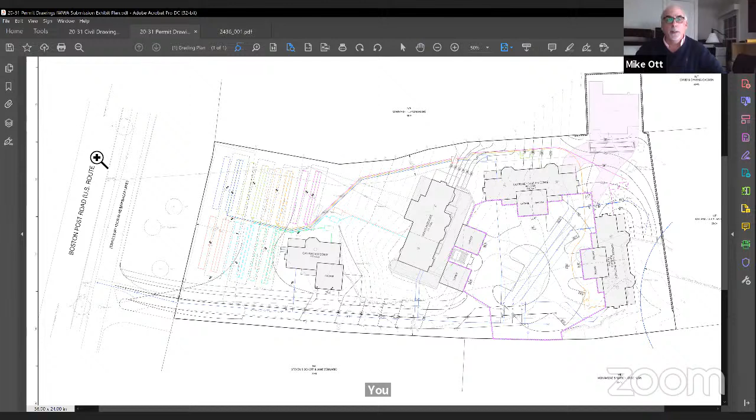I'll do this the same way I did it on the site walk on Saturday, I think. So the Boston Post Road on the left-hand side of the sheet, if you can see my cursor, Birnbaum Lane, adjacent to the Boston Post Road travelway. I think we spoke about this in the field, the existing driveway that serves the Ledges home on the property today will be widened to an 18-foot width.

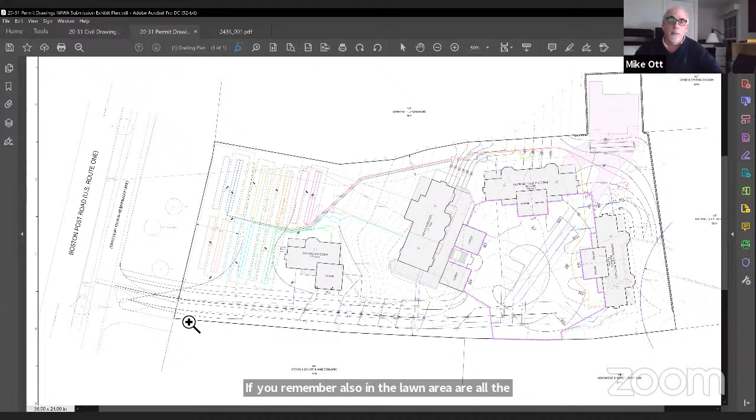The thing circling is building number 1, the gatehouse building down in the lawn area. If you remember, also in the lawn area are all the leaching fields. I don't know how well these colors show up, but I had to color them to keep track of them and the piping that comes into them. So there will be under the proposal a total of 7 residential units, and all 7 leaching fields that serve those units are down in this front lawn.

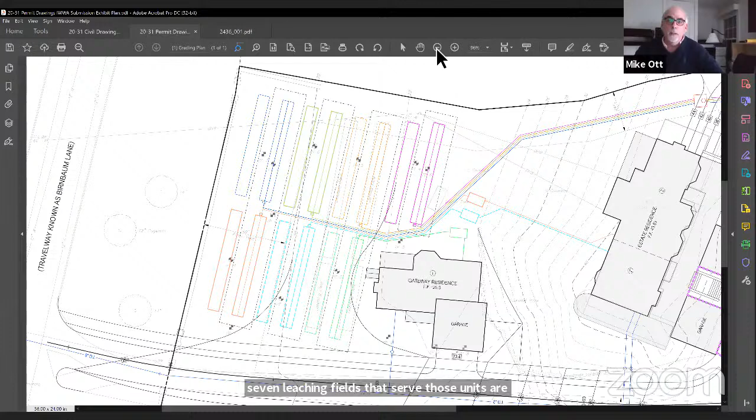There will be a little bit of rock removal to construct this first residence. Some of what I'm telling you, of course, is not directly related to wetlands, but I'll just do this as quick as I can, like I did on Saturday. There'll be a little bit of rock removal here to change the profile of the driveway.

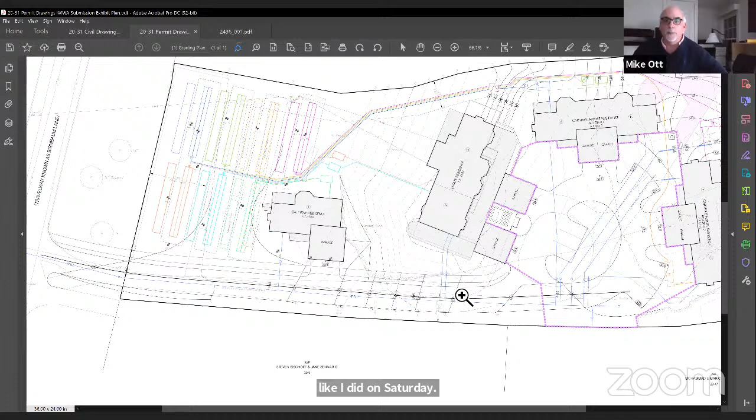And as you come up into the major portion of the site, if you recall, the estate house will be renovated and divided into 2 residential units. 2 new garage structures will be constructed. About 320 square feet, which I don't think I told you on Saturday, will come off the east end of the estate house.

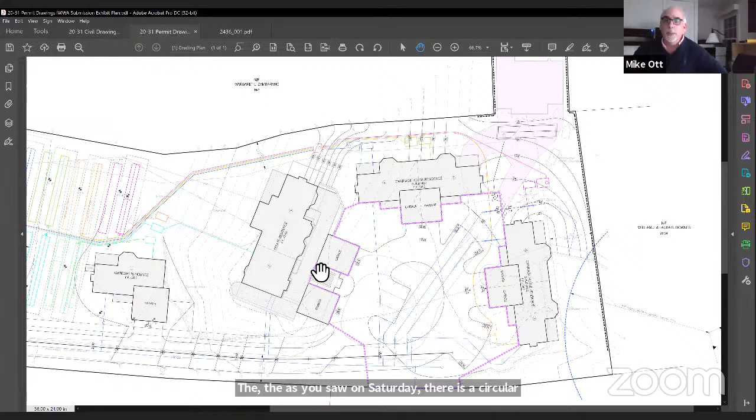As you saw on Saturday, there is a circular driveway here today. We will reconfigure it to allow for the parking that we've shown here and here and here. And the geometry of this is such that the town's fire apparatus can get up here and turn around.

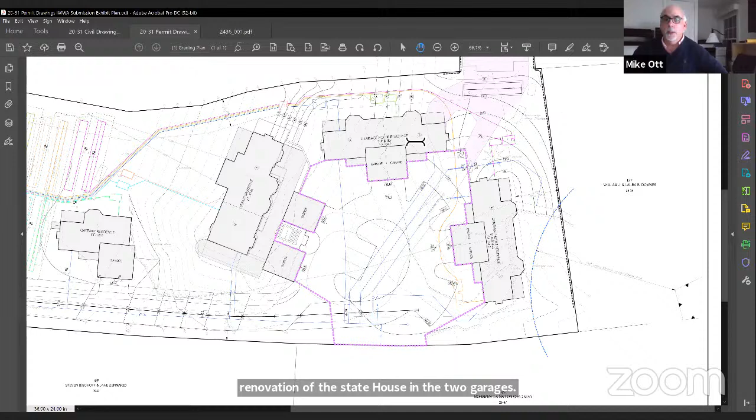So in addition to the new building 1 and the renovation of the estate house and the 2 garages, there will be 2 carriage house buildings constructed, 2 residential units in them. This is the first carriage house building and the second carriage house. The existing apartment building, if you recall, is to be removed.

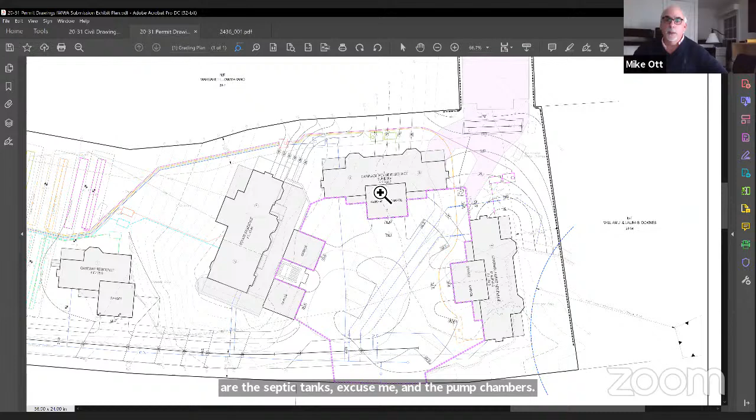In the rear, the only components of the septic systems that serve the 2 new carriage buildings, 4 units total, are the septic tanks and the pump chambers. I'll zoom in a little bit. This is a typical septic tank and a typical wastewater effluent pump chamber.

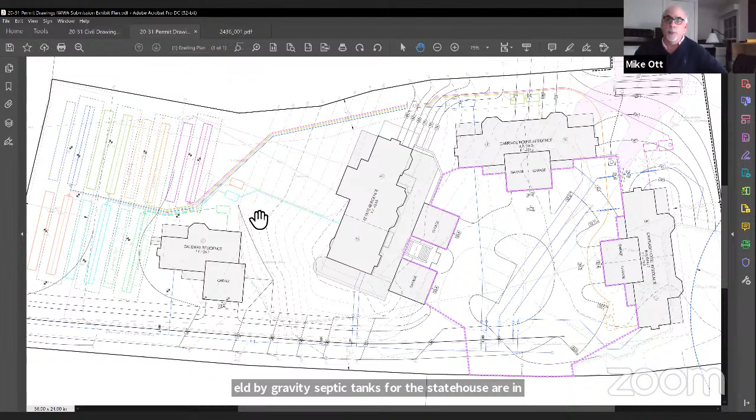The wastewater effluent will be pumped up, as you recall, to the east side of the existing estate house, to a distribution vault, and from here will go down the slope to the leaching fields by gravity. Septic tanks for the estate house are in the front, in the lawn, and the septic tank for building number 1 is in the lawn also. No pump chamber is required. So in the rear, we have 1, 2, 3, 4 septic tanks and 4 wastewater effluent pump chambers.

As I explained on Saturday, we are not changing surface water drainage patterns. If you recall, we are removing the apartment building and replacing it with gardens and seating in this appendage to the parcel. And we're also removing pavement in front of the apartment building. So this light purple shaded area is the total area of impervious surface that will be removed, and it is approximately 3,900 square feet.

So the building goes away and gets replaced by gardens and seating. The pavement goes away and gets replaced by lawn. We're actually reducing the total pavement area by a little over 100 square feet. But as I explained on Saturday on the walk, we are increasing the building roof area, of course, because we are constructing these 2 new units and these 2 garages.

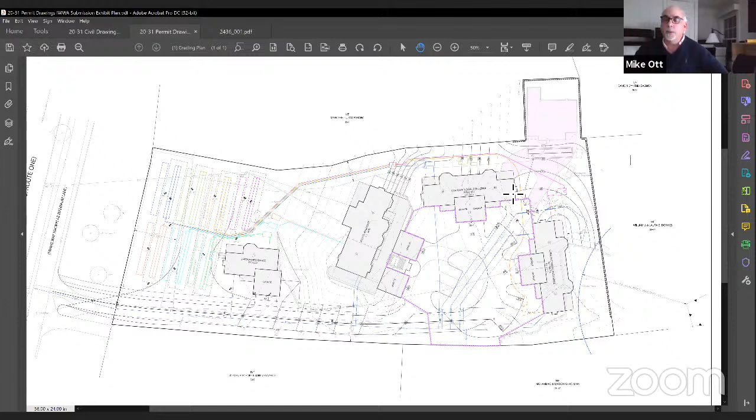They drain to an inlet here where my cursor is, and that water gets directed via a pipe to a subsurface infiltration system. It's sized to handle the water quality volume from this purple outlined catchment area. Although it's not required to treat these types of building roofs for water quality, we are going to infiltrate the first inch of runoff from the two new garages and the two new carriage house buildings within the existing island area.

We've done test pits back here, and there is 8 or more feet of depth of soil in the existing island area within the driveway today.

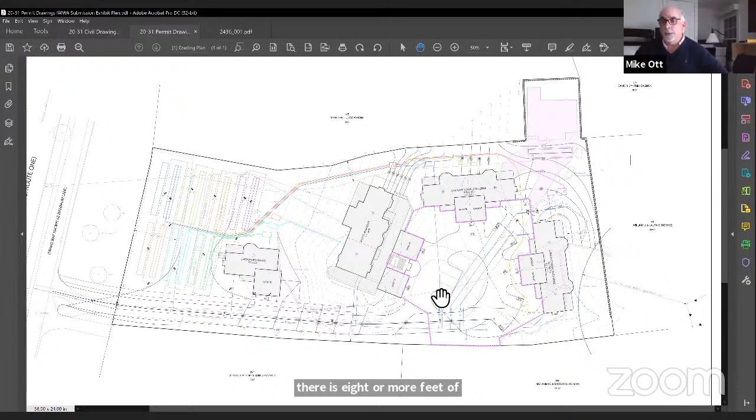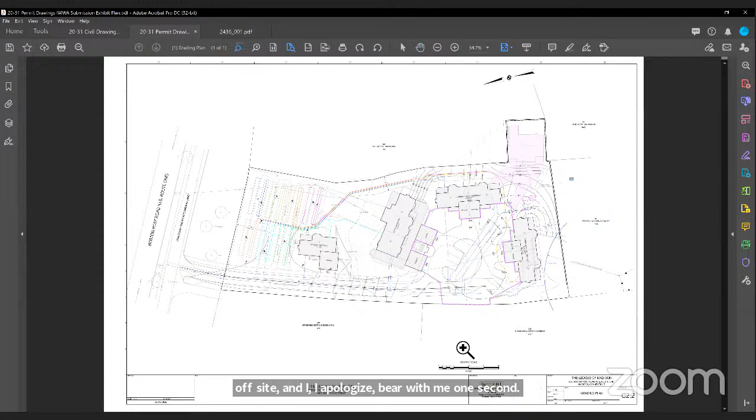So to get to what I think you're concerned about with regard to the wetland off-site, and I apologize, bear with me one second. So as we talked about in the field, there is an inland wetland located at the southwest corner of what used to be the applicant's property. And this wetland was delineated, I believe, in 2007 or 2008. It's shown on the record survey that's filed in the land records in the town hall.

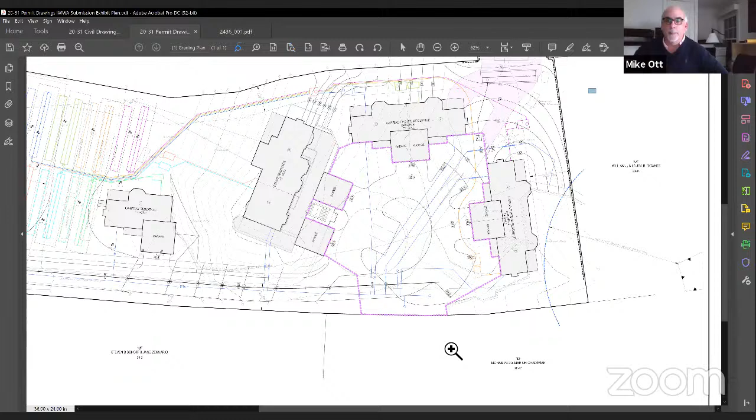This blue line is the 100-foot upland review area arc from this offsite inland wetland. If you remember, if I zoom in a little bit, we stood up here on top of the ledge and looked down at this wetland. This is where the two stone masonry posts were at the gate at the corner.

So the activity within the 100-foot upland review area is comprised of removal of rock along the southern and western sides of this new building, simply to be able to construct the building. As I said in the field on Saturday, we're not changing surface water drainage patterns. We're not introducing any new impervious surface area stormwater runoff to this wetland. We are simply excavating down approximately on a line that I'm tracing with my cursor into the rock to be able to construct this building.

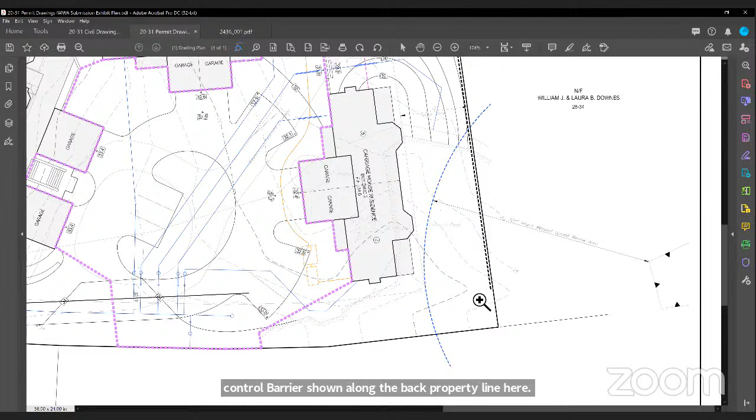And if you remember, I had said in the field, we need to go back into the rock behind the back of this house 10 to 20 feet in order for room to work and practically to be able to construct the house. That area will get backfilled again, and the area will be restored. There is sediment control barrier shown along the back property line here. It stops here because this is a ridge and runoff can't get up over that ridge and get to the wetlands. So that's why that barrier stops there.

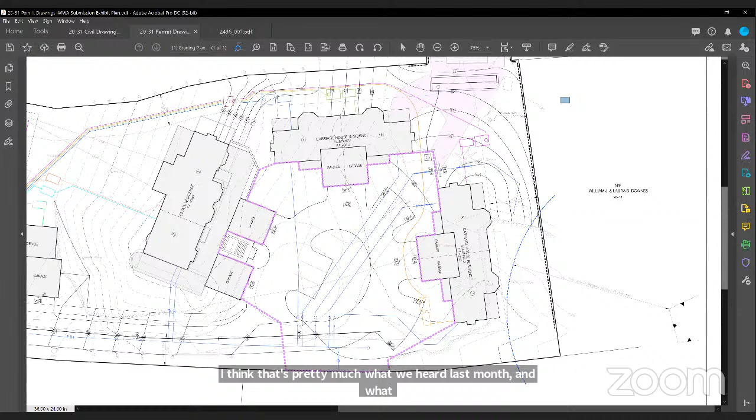And that's really the extent of the activity within the 100-foot upland review area. I'll talk about this other area in a second, but maybe I should stop here to see if the commission or the agency has any questions. I think that's pretty much what we heard last month and what we saw Saturday. So why don't we move to the other potential place?

Okay. So as Attorney McKeon said, when we were out on the walk on Saturday, George Logan, a soil and wetland scientist, was present, and he indicated that he was working for at least one adjoining property owner, and that he had delineated an inland wetland on this adjoining property. And we all walked down and took a look, and we saw his flags. Our activities removing this building and creating the garden and seating area are certainly within 100 feet of that inland wetland. But of course we do not have it mapped, as it just came up on Saturday.

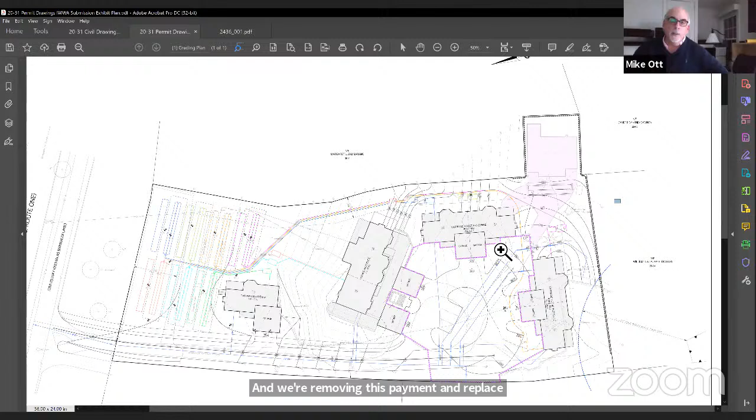It's my opinion that even though there is an inland wetland present here, our project does not have the potential to adversely impact it. I'll just very quickly say it again. We are removing this building and replacing it with gardens and seating, and we're removing this pavement and replacing it with lawn. And unlike today, where this driveway pavement drains ultimately in this direction, we are actually capturing the water quality volume and providing treatment for stormwater quality through the subsurface infiltration system.

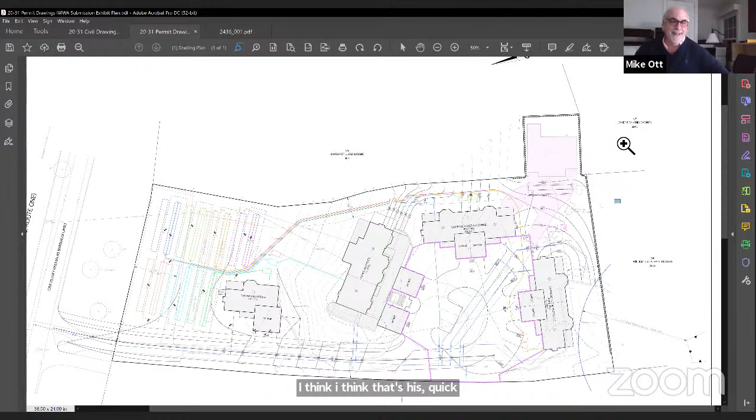So it's my opinion that this project does not present a potential adverse impact to this inland wetland. I think that's as quick an overview as I can do. And unless anyone has any questions, I think it'd be great for you all to hear from Rick Hosley.

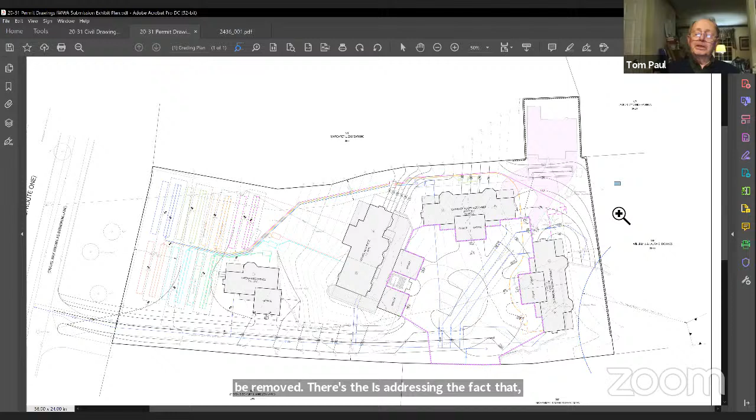I have a question. Saturday, you said that on the plans, where the garage is going to be removed, it's addressing the fact that while it's being removed, parts of the building as it's taken apart won't go into the wetlands. Was that siltation defense? Yes. Let me zoom in a little bit.

See the dashed line? Yes. That is sediment control barrier. It's called out on the plans, and there's a detail on the plans. It is geotextile silt fence, backed up by staked straw bales. Thank you.

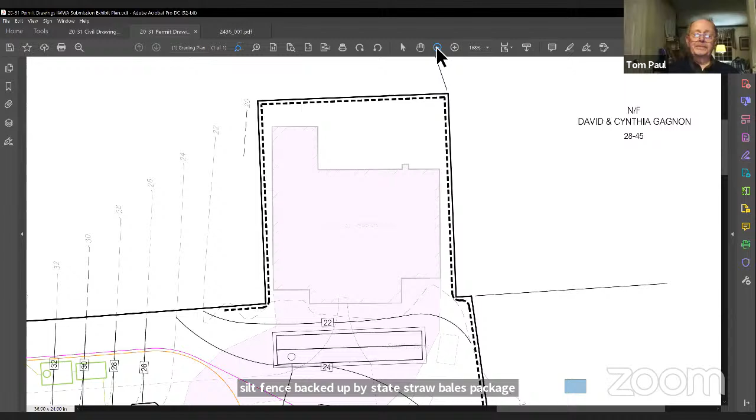I have a question, Kia. This is Joe. Now, on Saturday, I don't remember those two detached garages being talked about. I may have missed it. Mike, if those two detached garages weren't on the plan and they weren't a proposal, would building number 2 be able to go to the north and not embedded into the ledge?

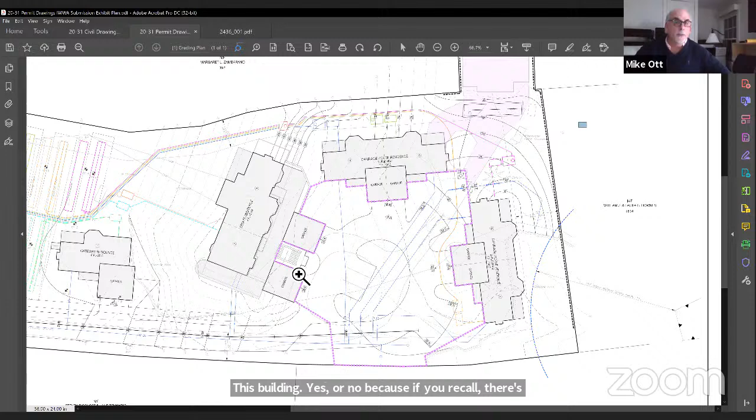This building, you mean? Yes. Joe? No, because if you recall, there's a set of stairs here to go up to the first level terrace, if you remember. Mm-hmm. So the edge of the pavement is right up against those stairs. Okay. So no, unfortunately. Okay. I didn't know if the stairs were proposed also.

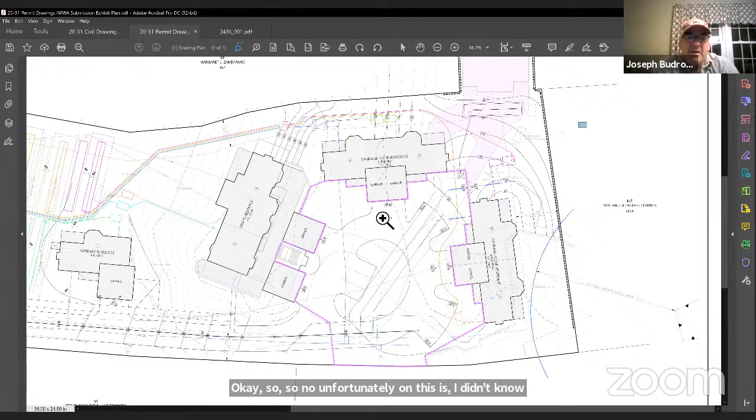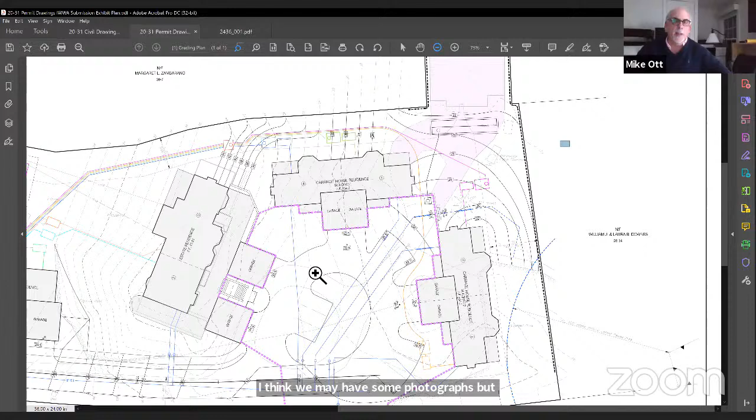Yes, they are. Actually, let me zoom in. I'll show you. This might be a little bit hard to see, and I don't think I talked about it, but see the stairs? So those exist or are proposed? They exist, and they're going to be reconstructed. Okay. I think we may have some photographs, but they definitely exist. I'm sure some of the members must have seen them out there. I just wanted to put on record that those two garages weren't the reason building 2 is farther south.

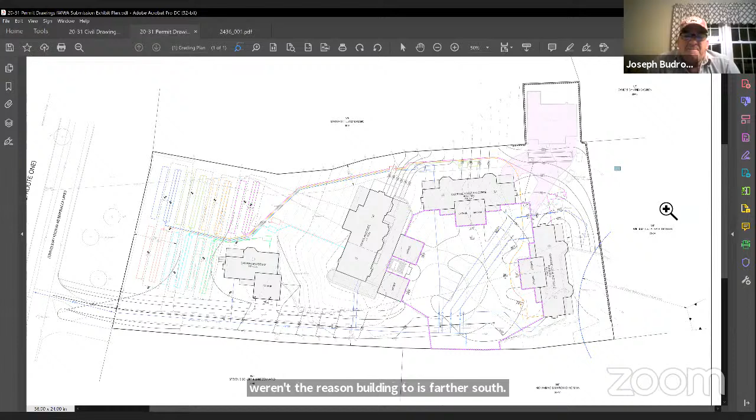Okay. Any other questions before we hear from the next person? Okay. So Rick, would you like me to leave that drawing up for you? At this point, Mike, we can call it back up if necessary.

My name is Rick Hosley. I'm a geologist, explosives engineer. I've got some photographs I'd like to share with you just to talk about the scenery a little bit and explain or answer any questions you might have from my opinion in terms of the geology, the geologic structure, and what is present on site. My company is Realty Securities. It's related to Hosley Companies. We are a 98-year-old company of explosives engineering.

You're familiar with the site of the ledges. And what's exciting about this site is the history and the fact that there's evidence on site that much of the property was built or sustained by the rock that is on site. And I think that may go back to prior to what we see present. In other words, it may have been quarried from other structures on site.

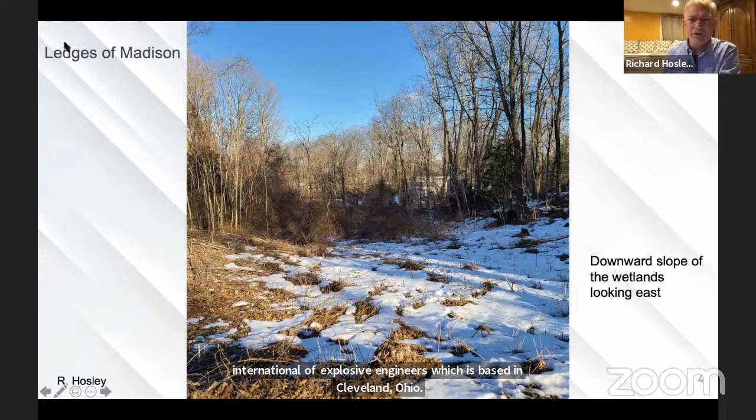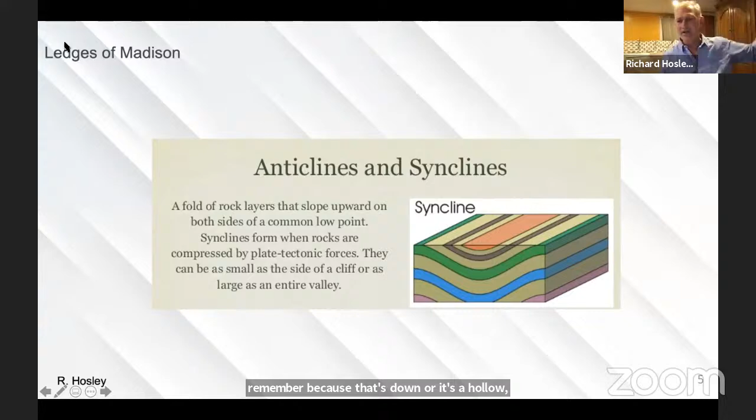This photograph is looking down into the wetlands, basically down into the water course from a higher elevation. And my purpose in this photo is just to talk a little bit about the topography. Essentially, that hollow or that downgrade is a syncline. Anticlines and synclines are rolling hills that are the result of compression from the formation of metamorphic rock. This is a metamorphic gneiss, again, called the Waterford Group. Syncline is easy to remember because that's down or it's a hollow. So when you sink, you go down, anticline, it comes up. A little easier way to remember that.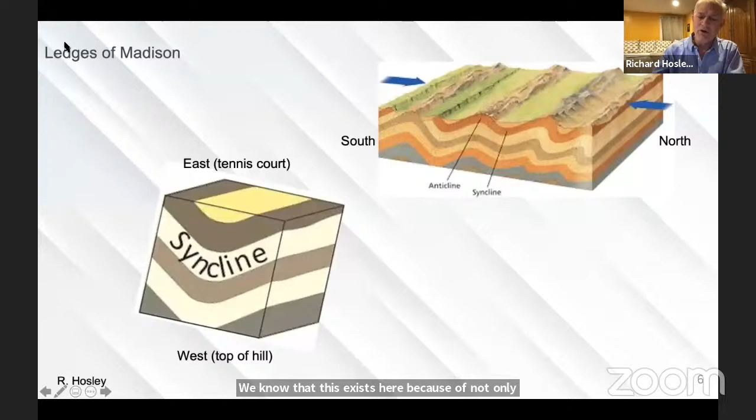This is another example of where the tennis court is, the syncline symbol, which is at the bottom of that slope. Top of the slope is the top of the hill. My illustration on the right is how that metamorphic rock is squeezed. And you have these knolls and hollows of repetition. We know that this exists here because of not only the topography, but also because there were some test borings that were dug or some test holes closer to the ledges residence in between the rock outcrop and the ledges. And there they found, I believe, 10 feet of dirt, 8 feet of dirt before they hit solid ledge.

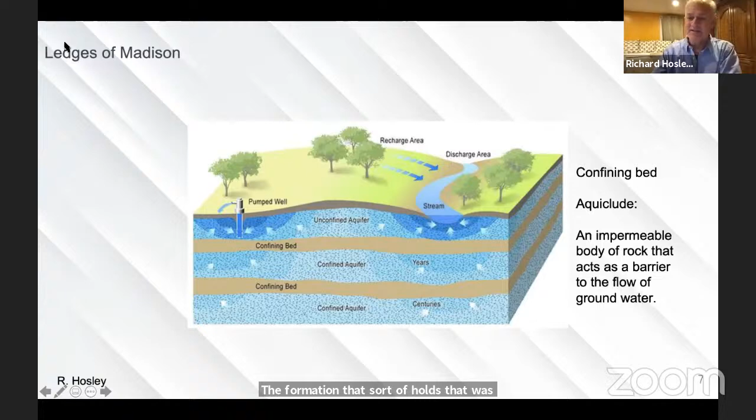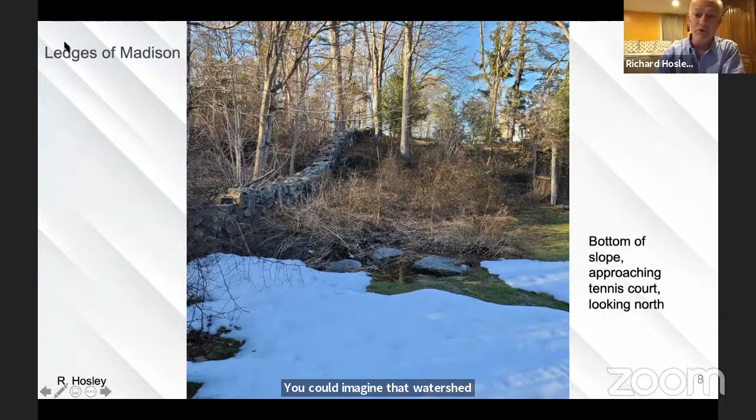So when we think about this wetlands, we think about the discharge area and we think about the confining bed, which is called an aquiclude. That's basically a non-permeable rock layer, the formation that sort of holds that water in that syncline or in that little valley. This is at the bottom of the syncline adjacent to the tennis court looking upward. You could imagine that water sheds from both sides of this syncline from the peaks, which are the anticline.

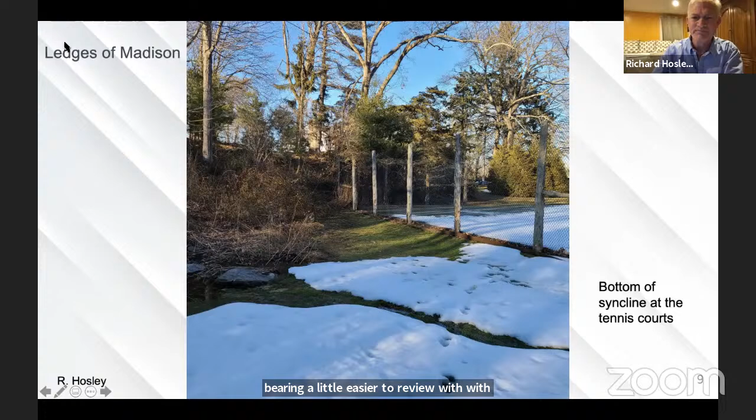Again, the tennis courts, just to sort of get your bearing, a little easier to review with a sunny day rather than a rainy day. Let me see here. Again, another view looking up the hill toward the ledges property. We're looking north in this direction.

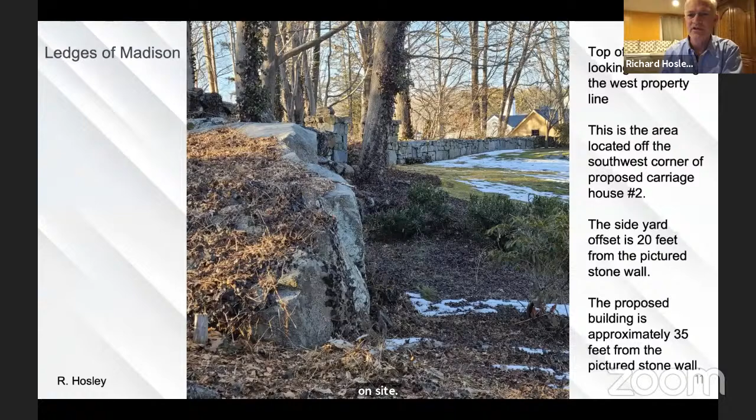Here we've come to the top of the hill where the ledges are located, the actual rock cut and face. And this is where there's evidence that there was some prospecting or dimensional stone production for what I believe are the stone walls and structures on site. The stone wall that you see in the background represents the westerly property line, again, looking north. Looking into the ledges that we were talking about earlier that I believe Mike mentioned that he was standing on.

What is prominent in these ledges or in this rock face is this cleavage or these planes that were a successful point of relief for past dimensional stone rock producers. In other words, they would use this cleavage, which may equate to a lineation of north to south in the crystal alignment when this geologic unit cooled. With that crystal alignment, you have a point at which you can cleave the rock.

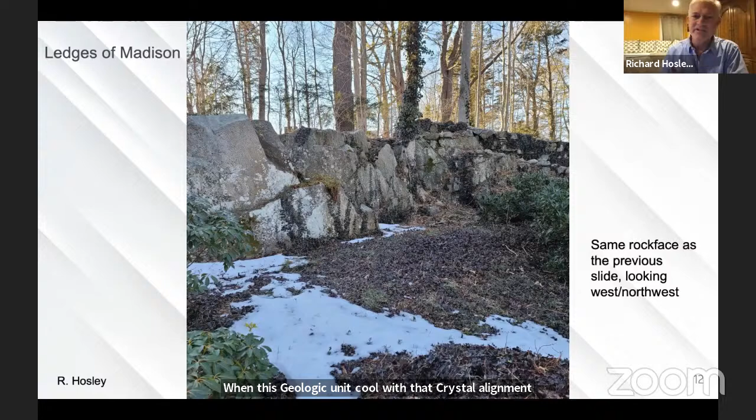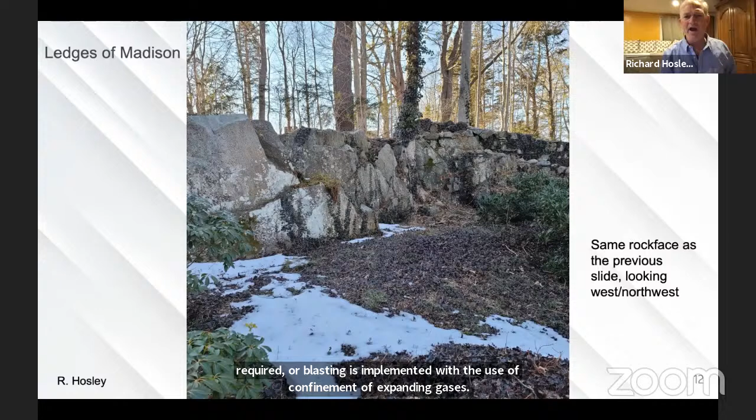This is significant in the sense that during rock removal, whether hammering is required or blasting is implemented with the use of confinement of expanding gases, these pre-existing cracks or the direction of north-south or this lineation dictates essentially how the rock breaks off and what the fragmentation size will be. This is a fine example of what we saw out in the field relative to some of the dimensional stone retrieval that we believe took place here.

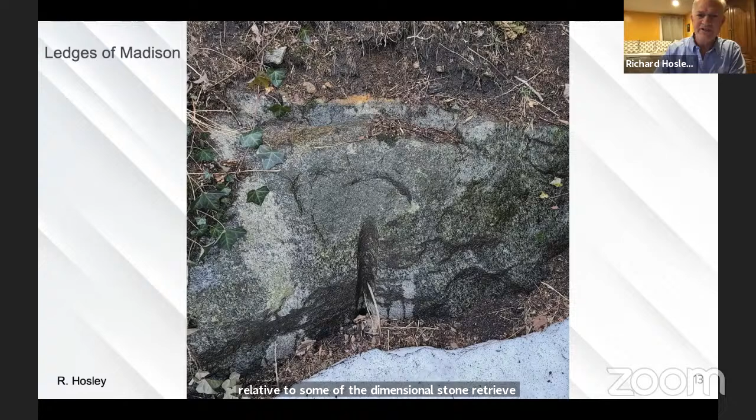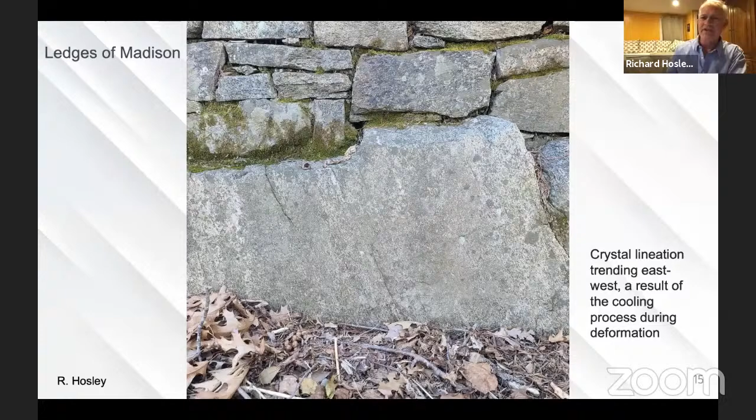This is another spot toward the bottom of that syncline outside of the tennis courts. As you can see in the background, we have the tennis courts. And I wanted to draw attention to this little stone wall, which is sitting on top of the ledge. With a closer look at it, you can see this lineation. These are essentially alignments or cooling joints that formed, that we call geologic structure, that is associated with metamorphic rock found in this area, the Waterford Group. If you note, this lineation falls at an angle of about 33 degrees.

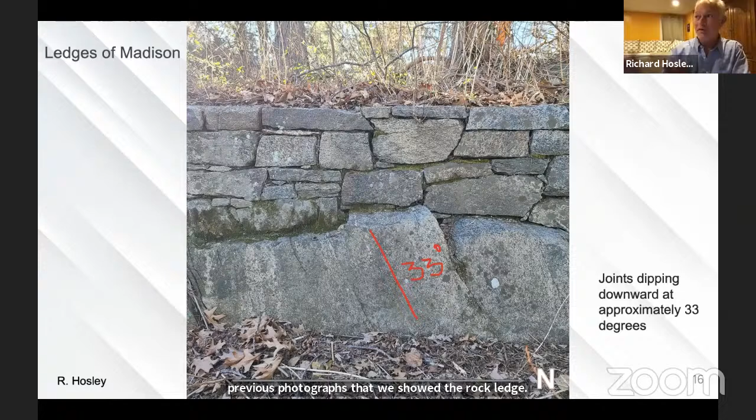Why is this significant? Well, as you remove this ledge, as you migrate rock removal toward the tennis courts or toward that syncline, you will be cleaving the rock at this angle. So the resultant rock face running east-west will be at 33 degrees. And in the previous photographs that we showed, the rock ledge will be north-south in lineation, but fairly straight up and down, almost 90 degrees.

Here's another example beyond that same photograph you were looking at, only over to the left. A natural crack has broken this way. Why is this significant? Well, if the rock to the right is removed, the rock to the left remains a solid, impermeable rock mass that will not allow the water to migrate through it. And I think this is significant in terms of not only sheet flow from the surface, but from the excavation if a foundation is put in within that 100-foot or beyond that 100-foot upland designation.

These are some photos of the front of the ledges. Michael mentioned that a portion of the front eastern section of the existing house will be removed. Right below that, you can also see another prospect. Again, this supports those northwest lineations or cooling joints that we've seen in the back.

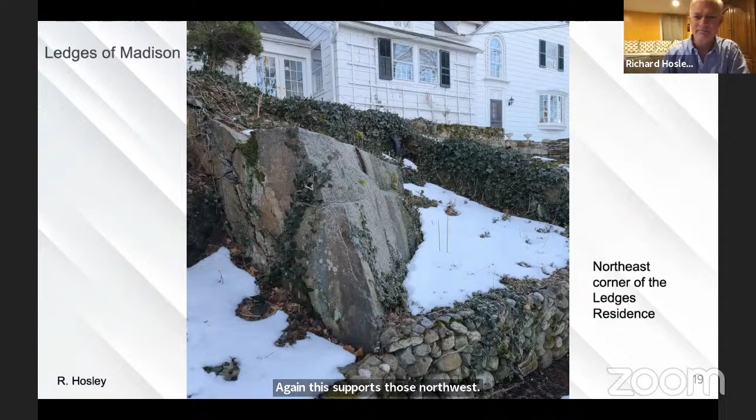This was cleaved out, again, I would assume for dimensional stone production, and it allows for the placement of what Michael described earlier, which was his septic system trenches and distribution box, that sort of thing. My point is that the geology lends itself to the direction that he has created or designed these trenches and underground utilities.

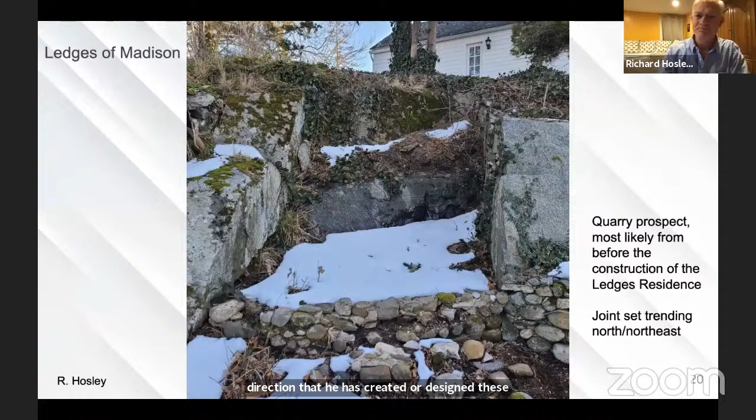This is another off-site point that I'd just like to bring to folks that are concerned about damage to rock outside of the construction removal. This is an example of basalt, which is highly fractured and intensely full of geologic structure, lots of cracks. What I'd like to point out in this photograph is that the blast design or the rock removal design was such that the half rounds of the drill holes remain, which are pointed out, evidence that only the rock that needs to be broken can be broken if the blast design is prepared properly.

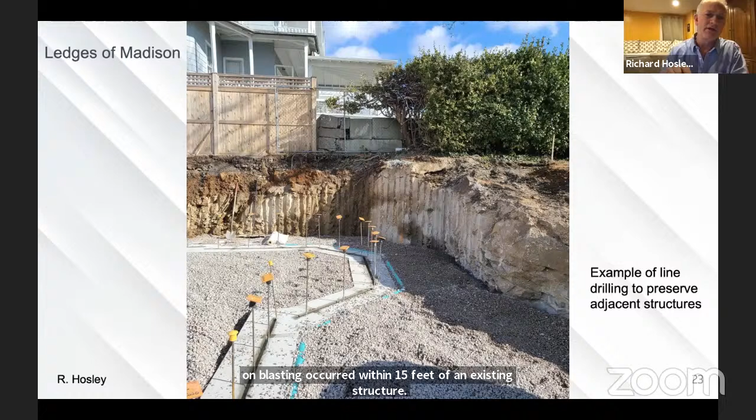Here are some others. This is a project in Stony Creek, Connecticut, that recently took place where rock removal and blasting occurred within 15 feet of an existing structure. These are very high-end structures right on the water in Stony Creek. A closer look at this describes some of the horizontal bedding or pre-existing cracks in the rock. And then to the left of the screen, you see some of the decomposed geology that occurs in various locations as you migrate through a geologic unit, depending on how it was formed.

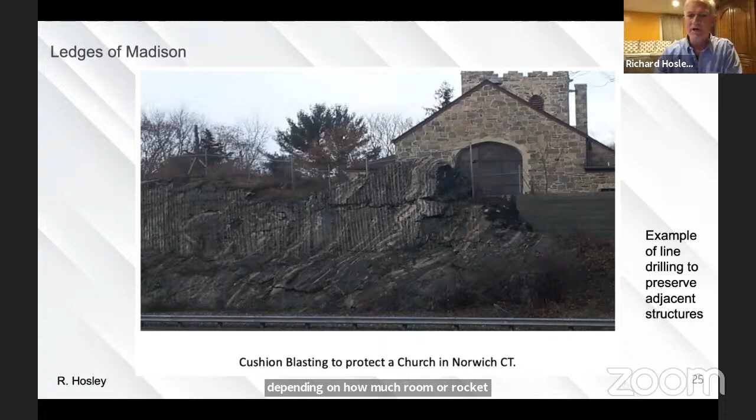So, and then finally, one of my favorites, this is in Norwich, Connecticut. This is where rock removal along Route 2 was designed to protect the structure behind it, a pre-existing church. And there are multiple methods of cushion blasting or sensitive blasting or low detonation velocity blasting that will help preserve this. And I'm recommending to the applicant that this be evaluated as we encroach on the wetlands, depending on where that wetland delineation is, and depending on how much room or rock excavation should occur behind the proposed buildings.

And with that, I apologize for being passionate about my work. I think it was very good. That's great. So for the commission members, agency members, any questions for Mr. Hosley? No questions. One little question.

That Stony Creek picture, how loud would you say that blasting was to the neighbors? So the interesting thing about this project is, and one of the most important parts of any construction project, is to involve the community. There has to be public relations, notifications of the work to take place, conversations about concerns, addressing to the community historical evidence that, say, a new construction project may not have.

Once that took place, concerns about the construction of adjacent structures, whether there was horsehair plaster in the adjacent construction materials, whether there were sensitive ground motion construction items or photographs on walls or vases, all of this attention to detail occurs long before any of the rock excavation. Therefore, opening a point of conversation so that people can talk about what their concerns are.

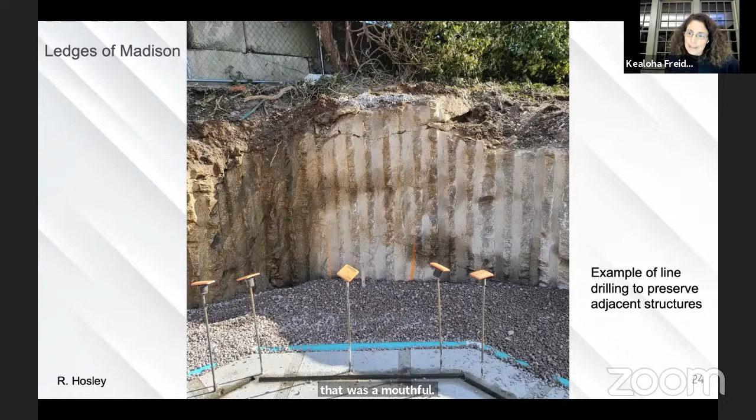That was a mouthful. All right, thank you. Any other questions? Yeah, any other questions? Okay. Well, I think that was all that we were expecting to hear from the applicant, right?

Okay. Reiterating my earlier request that we would like to keep the public hearing open until next month so we can gather the additional information and bring our same group back to address the area of wetlands that you all saw on Saturday that had been flagged on the adjacent property. Right. Yes, definitely, because we also are going to want to hear more about that since this isn't going to be fully complete.

All right. So I imagine given some of the letters, that we have a number of people who would like to speak. Is that right, Dave Anderson? And we have approximately 32 attendees on right now. Some of them are for later agenda items, but there are a number of people here for this agenda item. Okay. What I would like to just say is that this is inland wetlands. It is not planning and zoning.

I've read through the correspondence that people have submitted, and there are a lot of opinions about this type of development in this area, and that isn't what we are in charge of. So if possible, it would be great if, as people speak, they can really reference their concerns with respect to the wetlands themselves, because that's really all that we can talk about with respect to the application. So Dave, I'll let you handle people who want to come in and speak. Yeah, so for folks that are attendees on the meeting, if you could raise your hand if you'd like to ask a question or make a comment, and I'll unmute you sequentially as you raise your hand.

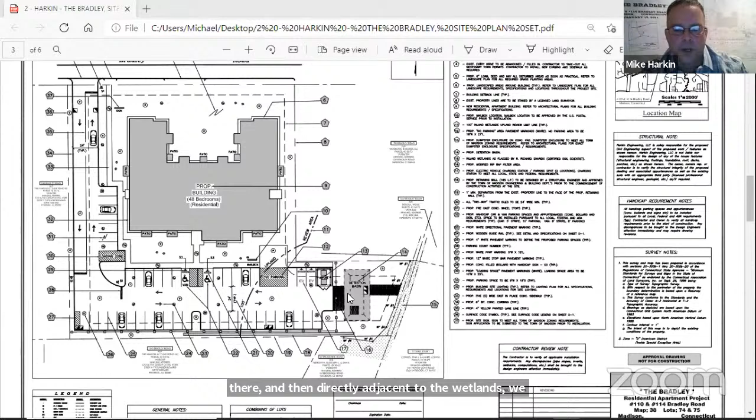If I scroll down more, you can see the site development plan, which again shows septic systems located in the front, one in the driveway, and two in the rear parking lot. Again, the 100-foot upland review area is where my cursor is. All the utilities are coming off the street. There's one section of utilities coming off the west that will run along the west side of the building and then tie back in over here.

And then all the drainage ultimately gets collected through a set of catch basins located throughout the project site, and then it gets piped into that proposed detention basin. The detention basin then has an outlet that spills over into that wetlands. So we're not really changing any drainage patterns on the site. All the water is getting into this wetlands. And I'll just scroll down real quick again.

So we have a full erosion control plan, a full sheet dedicated to erosion controls, where we have the stockpile area shown throughout the subject site, as well as silt fencing, as well as staked hay bales adjacent to the wetlands. And then we have a call out for erosion control blankets and the calculated size for the erosion control blankets. We have a large scale construction entrance in the front of the property. Every catch basin after install will have hay bales placed around it. All the catch basins will be equipped with hoods to catch any sediment or debris after the project is built.

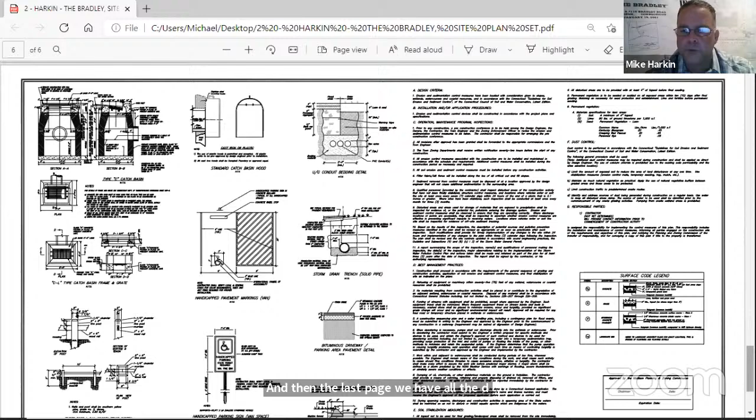And on the last page, we have all the DEP requirements for wetlands, such as dust control during the project. We will have a post-development monitoring program for that detention basin. So again, that's the project in a nutshell, as quick as I can go through it. We went into it pretty much in detail at the last meeting.

I took a series of questions at the last meeting. I answered them all. There was one that I couldn't answer. I think Tom had asked for the distance from our property to Tuxis Pond. And that distance is 540 feet from the edge of our property to the pond.

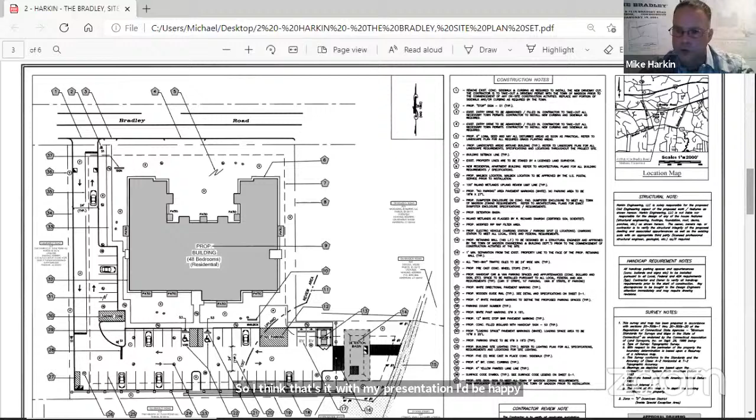So I think that's it with my presentation. I'd be happy to answer any additional questions that anybody else has or has thought up over the last month. Mike, I have one question. Sure. You have a septic system plan. Was that approved by the health officer?

Right now, that is getting approved. It's in the midst of getting approved by her. I had a sit-down meeting last week for 2 hours with her, just going over everything. She required some additional information, which was the physical layout of each floor plan.

This is at DEP? This is not DEP. No, we're less than 7,500 gallons. But you have more than 30 bedrooms. Right. So each bedroom is broken down 150 gallons per bedroom. So if you do the 48 times 150, we're less than 7,500.

So the septic break off is 0 to 2,000 is local. 2,000 to 7,500 is State of Connecticut, Mr. Bob Scully's department, and anything over 7,500 is DEP, which is Mr. Michael Hart's division. And Mike, that changed what, a few years ago? Yeah, it was implemented about 2 years ago.

Oh, it did. Okay. All right. Yes, that is a relatively recent change, Dave. It used to be 5,000 gallons, which is like 33 bedrooms. Well, it used to be 33 bedrooms on a certain length. Yep. Yes, sir. You're right. You're 100% correct. Exactly. And 2 years ago, they changed it to that 7,500 mark. Good. I'm glad to hear that. Okay. I retract my comments.

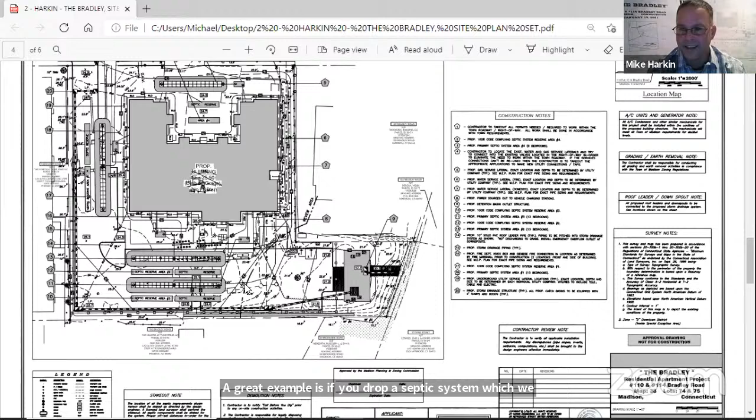A great example is if you drop a septic system, which we do quite often, 15 feet from the shoreline, the levels of nitrogen far exceed that 10 milligrams per liter going into Long Island Sound. In this instance, we're less than the 7,500 gallons. But in our design, to offset nitrogen levels, we do two things.

You can add a blower system, what they call a soil air system, which we've added to all these septic systems. That further reduces the nitrogen levels coming out of the septic systems. So we have soil air on all of these. And we have a lot of grass green areas. How you dilute nitrogen is with water. So with all that grass, water and infiltration, the nitrogen is diluted throughout the project site.

Well, I could talk about septic systems all night too. I think they're super, super interesting with respect to wetlands, but we'll just have to stop. The first 10 feet of a wetlands actually cleans the nitrogen out better than anything. Yeah, there's all kinds of things we could talk about, but we'll have to just save that for another time. Does anybody else have questions?

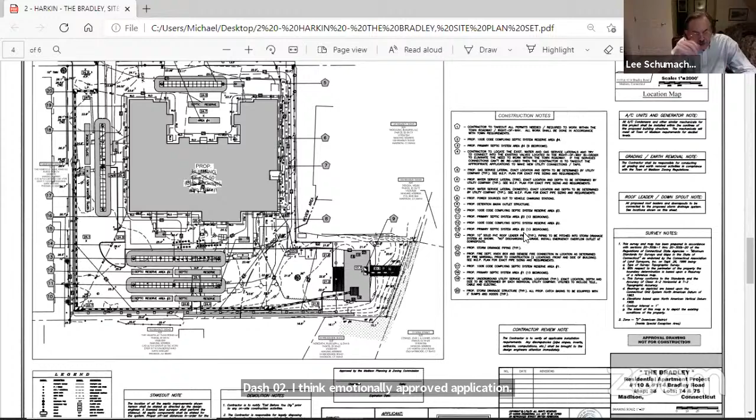Nope. No. All right. So again, this is our second time seeing this. So I will entertain a motion for how we want to deal with this application. I'll make a motion. I don't have the number though. It's 21-02. I make a motion we approve application 21-02 as submitted. I'll second it. All right, Lee seconded it. Any other comments or questions? Okay, all in favor? Aye. Aye. Aye. All right. Thank you.

All right, guys, thank you very much. And anytime you want to talk about septic systems, feel free. I'm kind of number one in the number two business these days. Okay. All right, guys, have a great night. Thank you very much. Thanks, Mike. Thank you. Thank you.

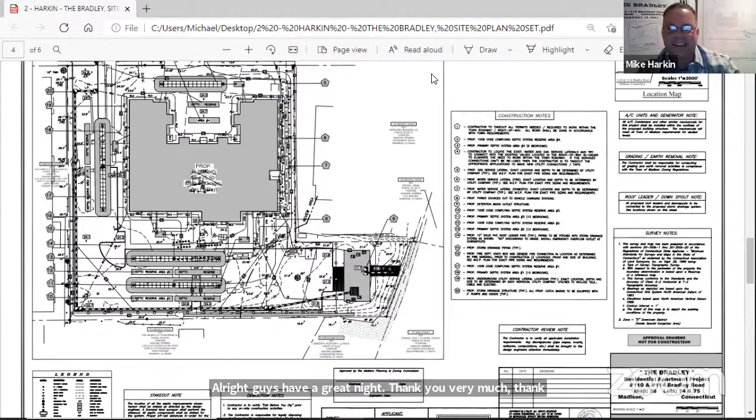Okay, we're getting there, guys. Now the next three applications are for receipt only tonight, so this is going to be our first go around. Our first one is 21-04, 68 Sterling Park Drive. Yeah, Kayla, I can speak to this a little bit. Rich Gentile, the owner of this property, is not able to attend the meeting this evening. So if there's any questions, I'm familiar with this. It's not an egregious wetlands project. It's a small addition to the garage. I can fill you in a little bit if you're interested, or we can hear it again next month. Whatever your pleasure.

How close, Dave, John, is this to a wetland area? 75 feet. Could we make it administrative? Yes. Or is there more activity around it? No, there's really nothing. That's a great question, and I'm comfortable with section 13, but I wanted the agency to just take a look at it, and unfortunately, Rich is not here. When I went through it, it's a 9x18 small shed, basically attached to the garage. Its closest point to the closest flag is 75 feet. There's no foundation. It's a slab on grade. No disturbance of anything that's there at this point. There's no footing drains. E&S will be prior to the start, maintained during, and all disturbed areas would be stabilized as soon as possible at completion.

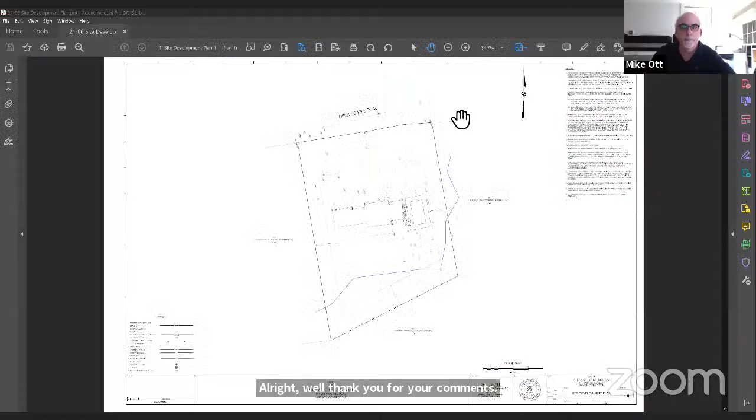All right. Well, thank you for your comments. Can you see my screen now? Yes. Okay. I don't know how I did that, but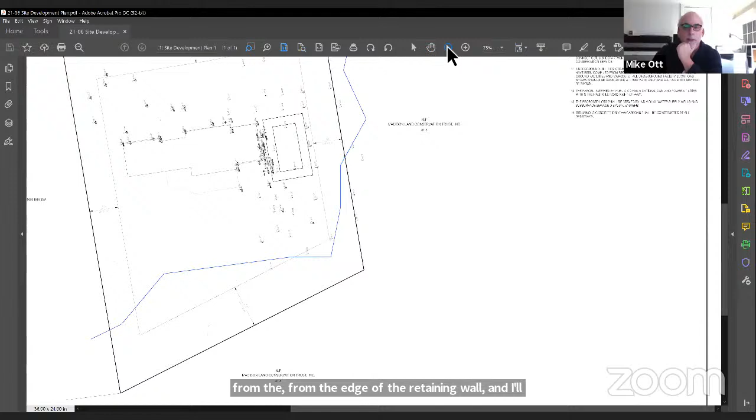so the blue line is the wetland boundary. This point is the closest point, which will be 20 feet from the edge of the retaining wall. Let me zoom back out a bit again. So Opening Hill Road at the top of the sheet, the open space parcel wraps around. This is Madison Land Conservation Trust. This is a single family home on the west side. The blue line is the inland wetland boundary. You can see it comes around the back.

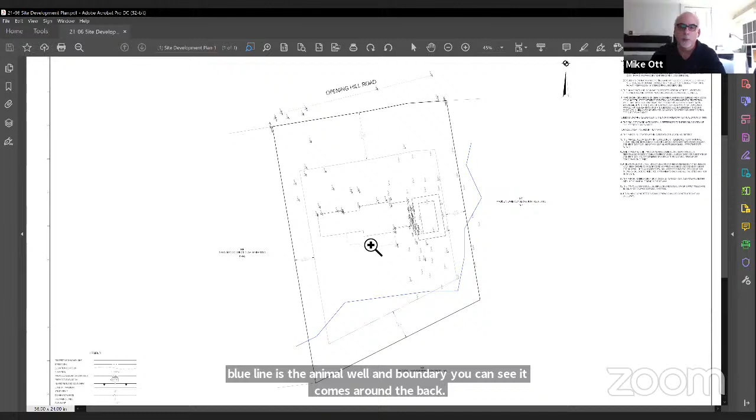We only did a partial topographic survey. If you were to come out to this site, you would see that all along the length of the house, the backyard is raised up very high and drops down to the inland wetland. This is actually the only place to get a pool and to be able to get it furthest away from the wetland that we can. So it's this short distance right here at this point. That's the 20-foot distance that I was talking about.

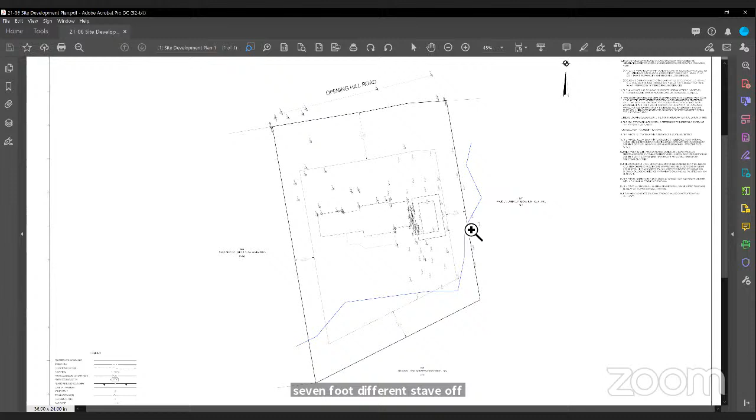What's the grade there, Mike? It's about a 6 or 7 foot difference, Dave, over about 20 feet. Okay, thank you. Yep. But the building setback line, which I'm tracing, is the line that we have to respect, of course, with the retaining wall, not the patio, but the retaining wall.

Okay. Where's the retaining wall, Mike? I guess I missed that part of the presentation. I'm sorry. I'll trace it here. It'll be right along the building setback line, right here. And what's there now? Is it yard now or is it woods? It's a grass slope down to the edge of a wooded area just outside of the wetland boundary. So this is the lawn, a sloping lawn, 6 or 7 feet elevation difference. Similarly in the backyard, it's a sloping lawn.

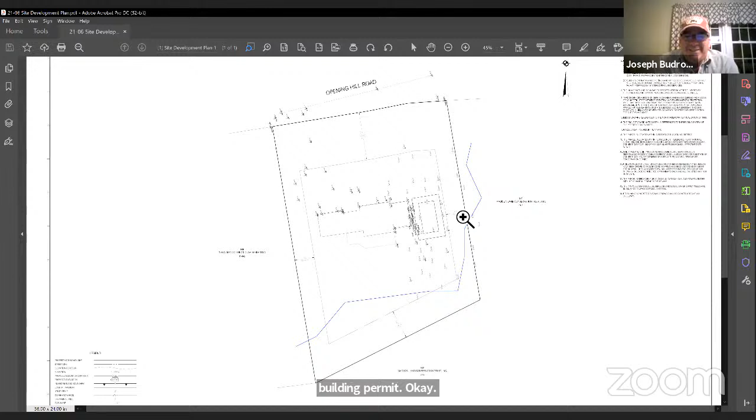From lowest grade to top of the retaining wall, how tall is it? 6 feet. Okay, nothing that the town engineer should look at? Actually, the town engineer wouldn't look at it. The building official would. It'll need a building permit. As you know, Joe, right? No. I slipped for a second. You slip. Yeah, it will definitely require a building permit.

And there's excavation. And the materials I got didn't have that site plan. So no, I don't know if anybody else did. You did not, and I apologize. We waited for the snow to melt a bit. We actually did the survey Friday morning. Wow, Friday morning. I just can't find that. I apologize. I should have said that when we started. Yeah, 'cause I went through all my files. I was like, I don't even have it. I don't think any of the new apps had submitted plans. Oh, no, Liberty, our last one, has one.

Okay. So there's going to be excavation, presumably, right? For the retaining wall foundation, yes. And then all the proper soil and erosion control measures. Yeah, and I can go through it in much more detail at the next one, but yes, absolutely. There'll have to be a sediment control barrier, and if they have to dewater, it'll have to be pumped up on the lawn, so it'll drain back after infiltrating into the grass, and all the standard controls that you would put in place for work that close to an inland wetland.

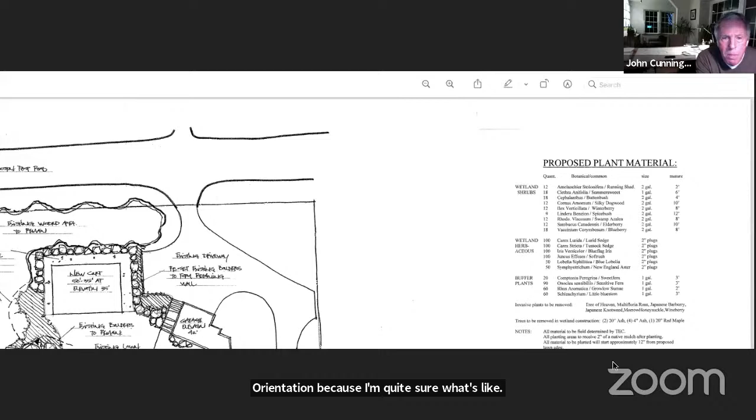Okay. And if you like, Claire, I can share my screen of my plan just to quickly go through it, or we can wait till next week, whatever you'd like. Well, I think you could share because if you're creating a wetland, we may want a site walk, but if you can share, then maybe it'll help us. Okay. Give us orientation, because I'm not quite sure what it looks like. Okay, can everyone see that now? Yes. Okay. I know it's getting late. I'll be as quick as I can.

Here's the existing residence. The upper garage area is at elevation 42. The residence runs on Boston Post Road. It also has a driveway that empties out onto Liberty Street, so it has two different entrances. Right now, the rear of the property is just all lawn. The wetland area, as you can see in my plan, was flagged by, I believe, Rich Snarski probably 10 years ago. We're leaving that as is. We did make a note that we'd like to remove any of the invasive material in there.

The little area that I talked about is this area where my cursor is right now. It is full of Japanese knotweed and wineberry. There's nothing in there that is of any value to any wetland. We'd like to fill that back in so it's back up to elevation 34, which the rest of the rear yard is. That being said, this little slashed line would be a new planting bed that would act as a filter from the lawn area to our new wetland area. This is the new area that Rich would be working on. It's at elevation 25, where the rest of the wetland area is at elevation 26 to 27, so it works in well with the existing wetland.

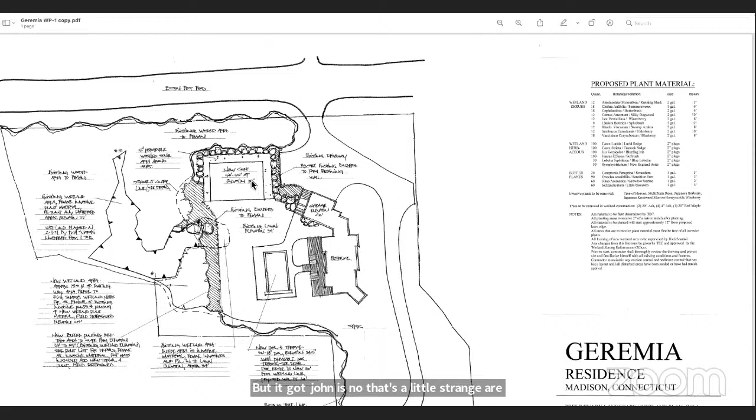John, I assume that's a little stream running south out of there? At the bottom. Go ahead, I'm sorry, Dave. There's no stream on the area, just the existing wetlands. Well, what's that squiggly line that comes down there, under the pool? Tree line, I think. Oh, I'm sorry. That's just the existing branch structure of the existing trees, Dave. Oh, okay. I can't read what it says, so thank you.

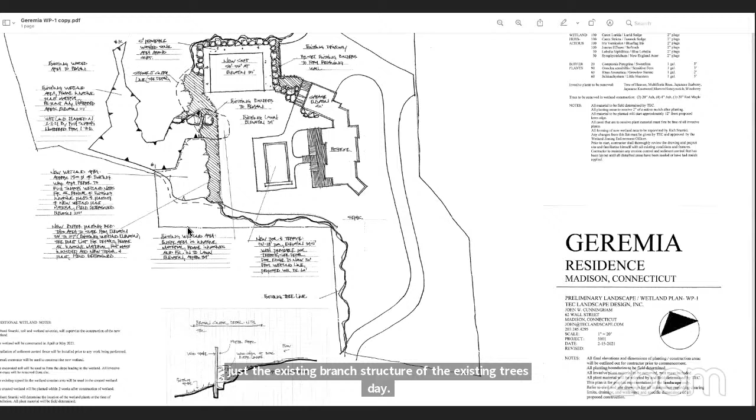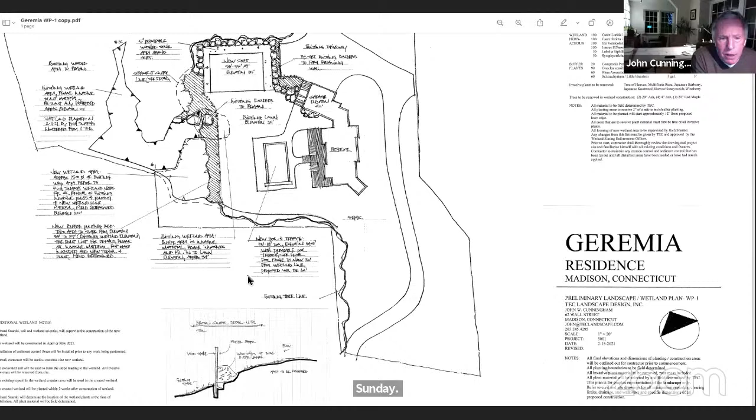Are there any questions? So it looks like everything's within the 100-foot review area. Is that what I'm seeing here? Yes, it is. John, I assume the application is complete? Yes, it is. If you read through this, Dave, all of Rich Snarski's notes are on my plan and how he's going to form the new wetland. The plant list is in the upper corner. We have wetland shrubs, wetland herbaceous plant material and buffer plants also for the area that's going to run along the wetlands.

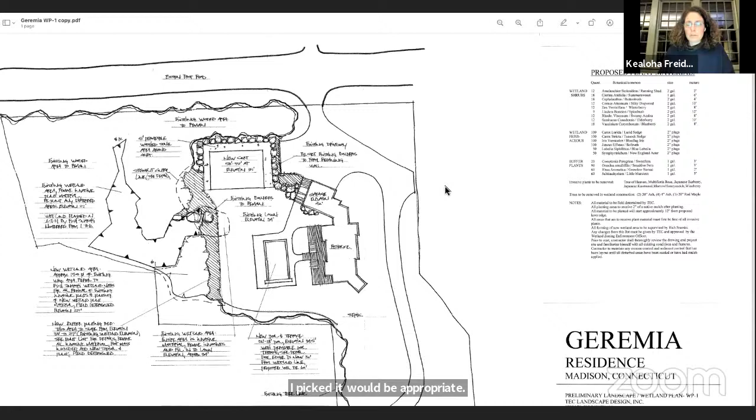Okay, so that's a lot of activity within the regulated activity area. I would be comfortable with the site walk given that much activity plus filling and adding wetlands. I think that would be appropriate. So maybe John, Delora, you can help us schedule something. Yeah, we'll put something together, probably a Saturday. Does that work best, or Friday afternoons or evenings? We're getting more light now. Okay, why don't I just send you guys an email with some thoughts. We've got almost 5 weeks until the next meeting, so we've got time.

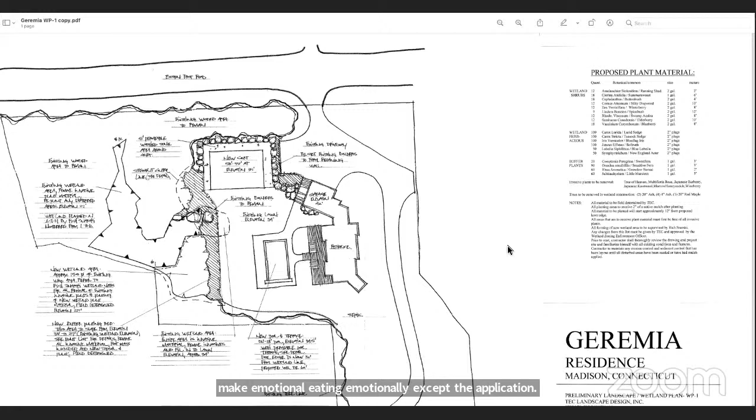All right, I'll make a motion. We accept the application on Liberty Street and schedule it for next meeting and schedule a site walk, which is John's responsibility. I'll second it. Any more discussion? No? All in favor? Aye. Aye. Okay, great.

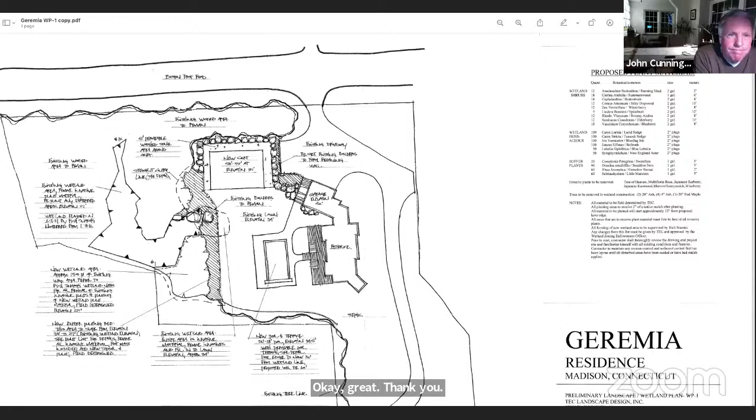Thank you for your time. Thanks, John. I guess we'll see you on the site walk. Take care. Thank you, Dave Newton. You've been our making a motion person. It's great.

Moving us along. No, it's good. That's good. All right.

So back to our agenda. We are through our applications. We have no section 13 approvals. Hopefully you guys looked at the minutes. We had our special meeting minutes from February 16th, as well as our regular meeting minutes from February 8th. I will start with, I do have a comment on the February 16th. I just had a question, or a comment.

There are 4 pages. This is the bottom of the 3rd page, right before the bold. It says, concerns should be highlighted as challenges, and concerns could be specific, according to Chairman Freidenberg, who opposed the idea of simply writing a general report. But I wasn't sure what I was opposing. I don't think I was opposed to a general report.

I'm wondering if I missed something or if anybody remembered. I don't know. It's like, oh no, what did I oppose? But I don't remember. What part of the meeting was that? I don't have them in front of me. This is when we met with the lawyers.